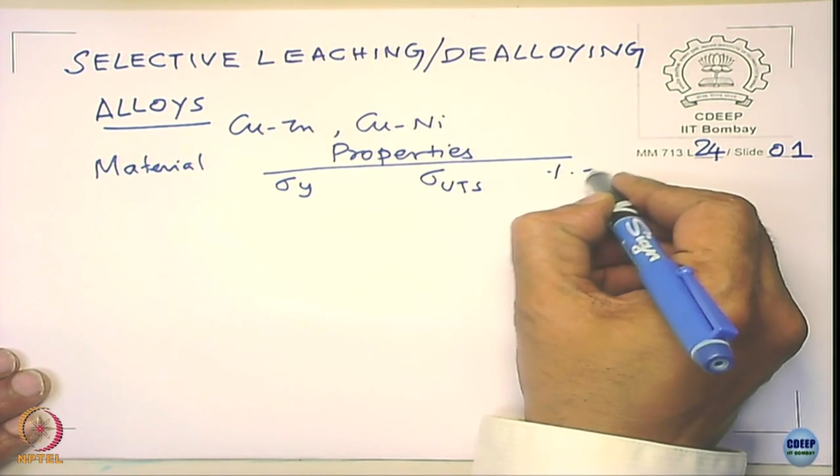Now, if you take a material and look at the properties, mechanical properties, maybe the yield strength, the ultimate tensile strength, and the elongation, this is the percentage elongation. The units can be megapascal, and you can appreciate how alloying helps to improve the mechanical properties.

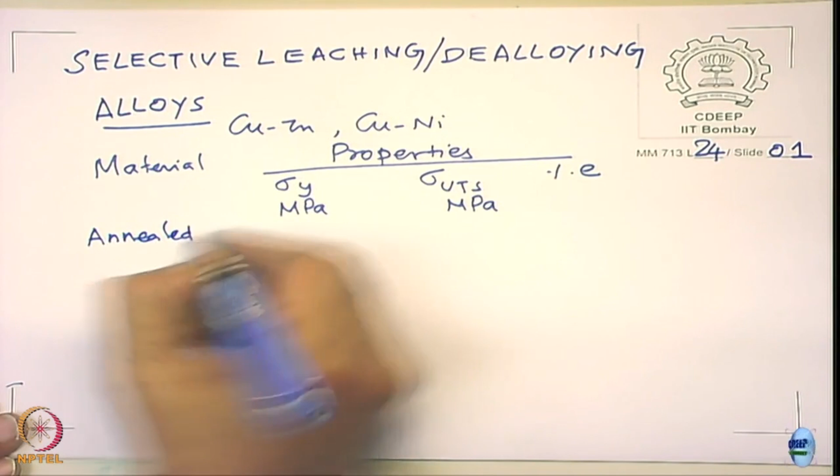Suppose you take an annealed copper, annealed pure copper. Copper is very pure. If you look at the mechanical properties, the yield strength is only 33 megapascal. The ultimate tensile strength is 209 megapascal. The percentage elongation is about 60.

If you take a commercial pure copper, take this, the strength increases considerably. Of course, the strength and the elongation are many times inversely related to each other.

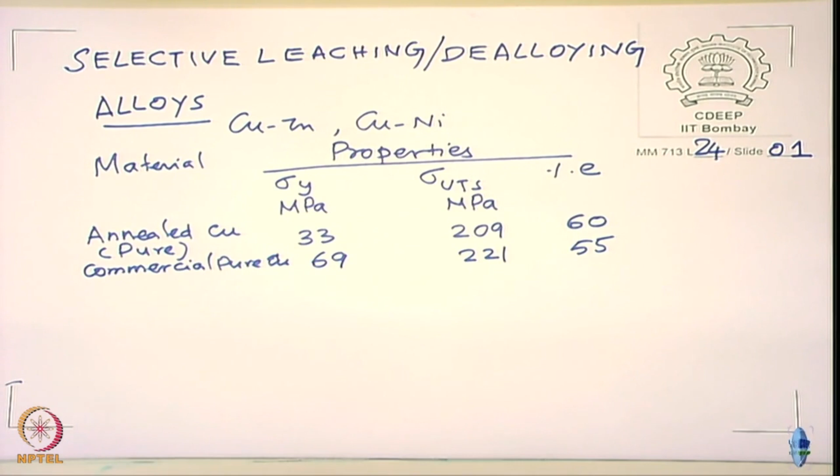But if you take a brass, which is copper with 35% zinc, annealed, you will see the strength increases quite significantly. In this case, even the elongation also is improving.

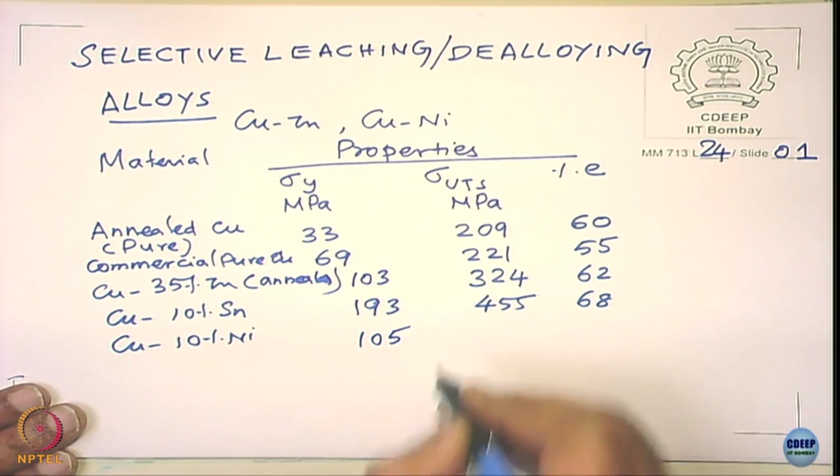If you take copper with 10% tin, you can see that the strength level is again increasing. If you look at the copper nickel alloy systems, say copper 10% nickel, I am talking about weight percent, the yield strength is 105 and the UTS is 275. The ductility varies depending upon cold worked or not, it can vary from 15 to 35, depending upon how they are done, quite widely.

If you increase the nickel content further, say 30% nickel, again there is an increase in the strength level, it can vary in a similar range. So, in essence, we go for alloys because we want to improve the mechanical properties, especially strength of the metal. But if you look at this, we have seen earlier when talking about galvanic corrosion,

when you have copper and zinc as two different entities, a copper block and a zinc block, if you couple them galvanically in the environment, what is expected to happen? The zinc will corrode preferentially, it becomes an anode, and the copper will act as a cathode. So the active metal dissolves and the noble metal gets protected. They are macroscopic, there is a clear entity of a copper block and a clear entity of a zinc block. Between these two the current flows, copper acts as cathode and zinc acts as anode, the current flows between them.

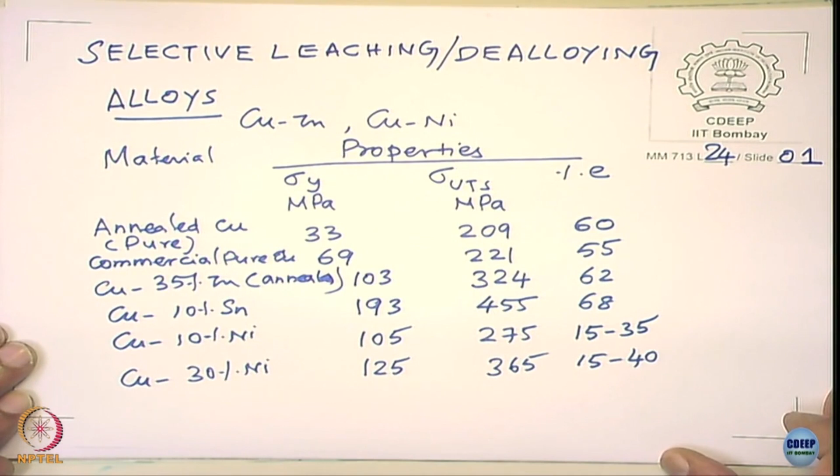But in an alloy, let us take copper with 35% zinc, which could be a homogeneous alloy, we will talk about it later. They mix it at atomic level, they are homogeneously dissolved, and more so in the copper nickel systems. The copper nickel system is known for having extended solid solubility. So at atomic level they mix very nicely, but even then the electrochemical property of copper is different from the electrochemical property of zinc, or in the case of brass, and in copper nickel alloy, the nickel is different from that of copper. So you could see having different electrochemical properties, and so you expect at atomic level exhibiting different corrosive behavior with respect to the two different alloying elements. That is why we talk about selective leaching, or dealloying.

Now, to just give an example of how the system can become complicated, let us take this phase diagram. This is a famous copper zinc phase diagram. I think most of you might have studied this in a physical metallurgy course, and you will see a lot of peritectic transformations, we call it. The copper zinc system exhibits different phases. When the zinc content is less, you have an alpha phase. As you increase the zinc content, what happens now? You can get a beta phase somewhere here. The composition lies between them, you get an alpha plus beta phase.

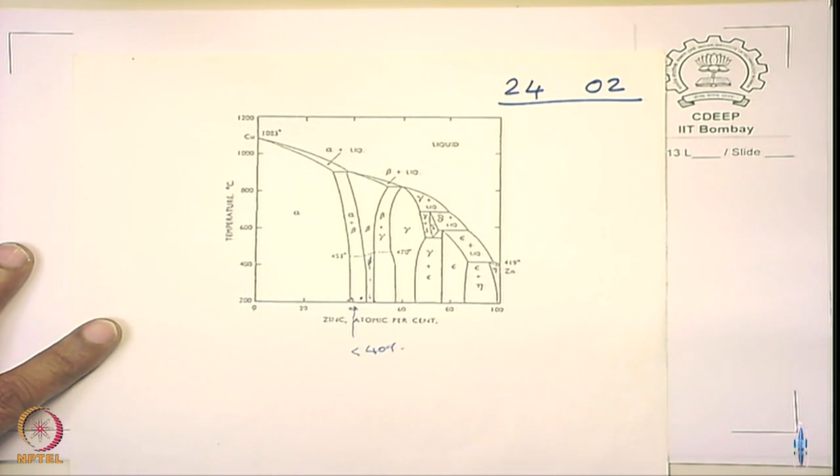Of course, you have gamma phase, epsilon phase, eta phase, and so on. From the point of view of real engineering applications, the alpha phase and alpha plus beta phases are important. We call them alpha brasses, alpha plus beta brasses, beta brasses, Muntz metal. These are all very familiar to you.

What I want you to understand is the amount of zinc varies depending upon the type of brass you take. Why do you take different brasses? Because they have different mechanical properties. The alpha plus beta brass will have different mechanical properties, in fact it could be much harder compared to alpha brass. So from the structural point of view, we need to use different types of alloys, which means they have different electrochemical corrosion properties. That is the crux of the matter.

Now these are some examples. You can also have various other alloy systems, and these processes are classified depending upon which element is selectively dissolving, selectively leaching.

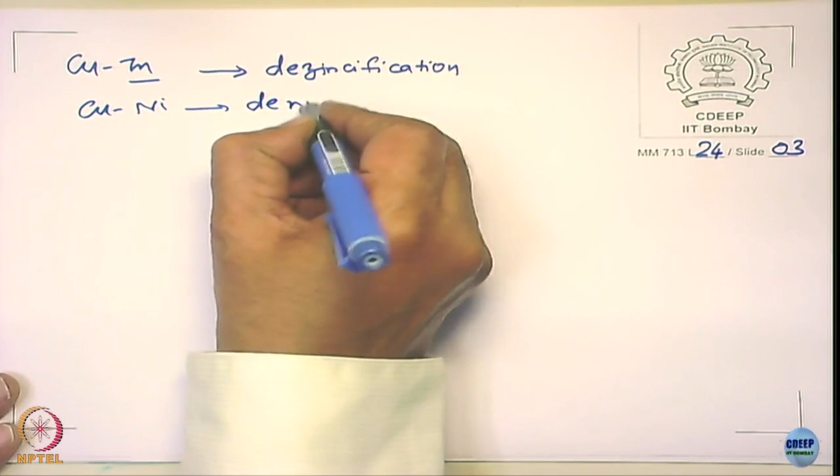In the case of copper nickel, we call it de-nickelification.

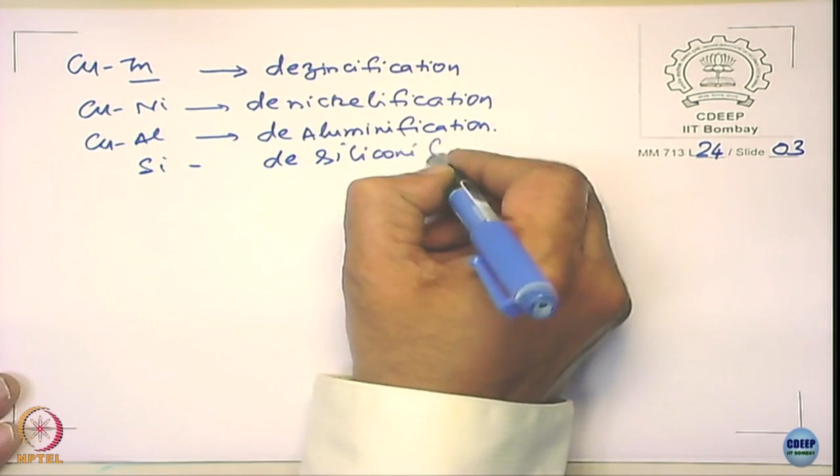You may have something similar to copper aluminum, and aluminum can be with even other alloying elements. We call them de-aluminification. Suppose you have silicon, we call it de-siliconification, and so on and so forth.

These elements are selectively dissolved because they are relatively anodic compared to the next element.

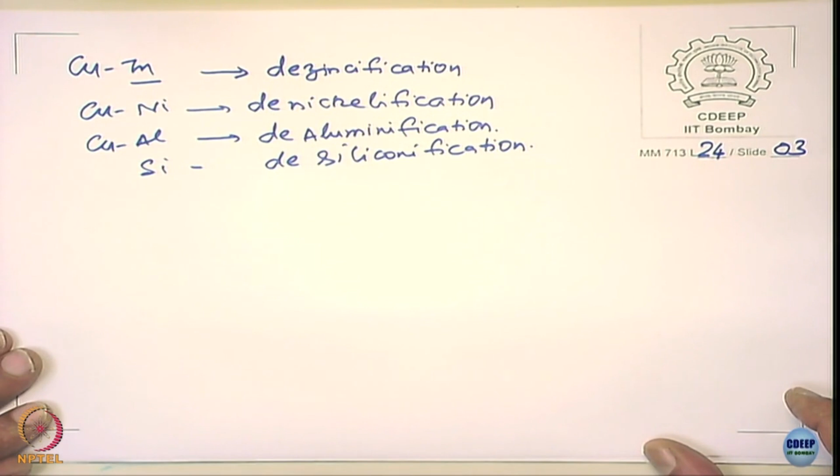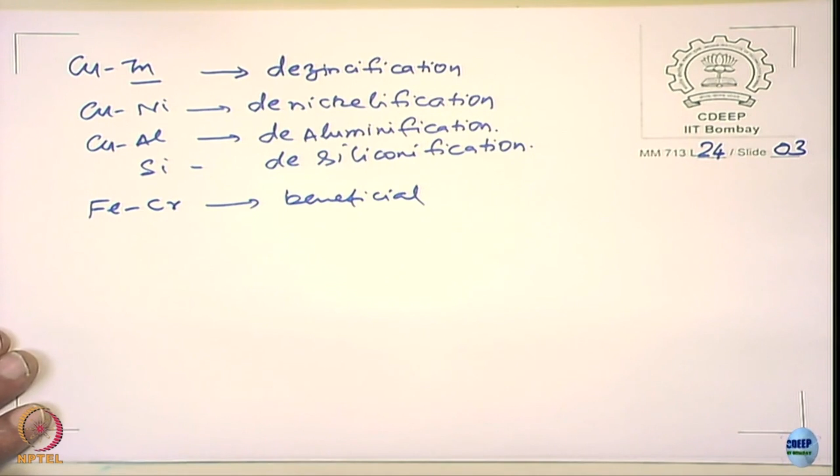Sometimes selective dissolution, preferential dissolution is beneficial. For example, in iron chromium, it is beneficial. Why? Because they form passive films. So you need to contrast these cases and understand how this is really happening.

Now, in order to use these alloys, let's say copper zinc, copper nickel, and whatever alloys we talk about, we need to understand the concept of selective leaching or dealloying in terms of mechanisms, in terms of the factors that affect dealloying. If you know both of them, then you can devise means to control dealloying.

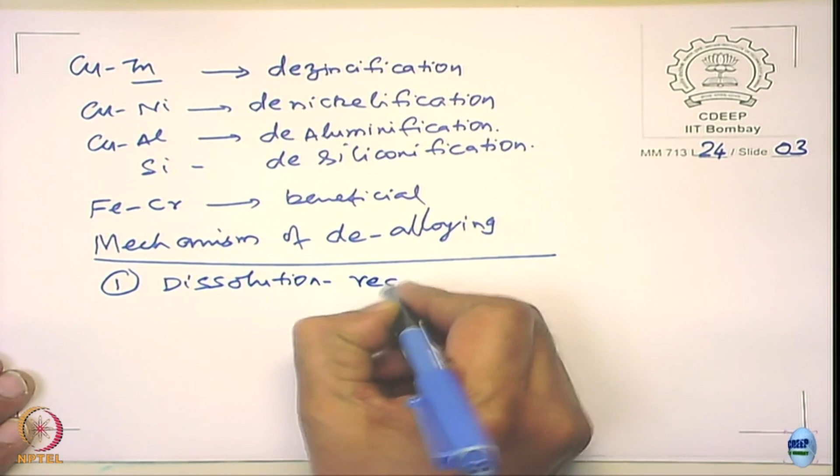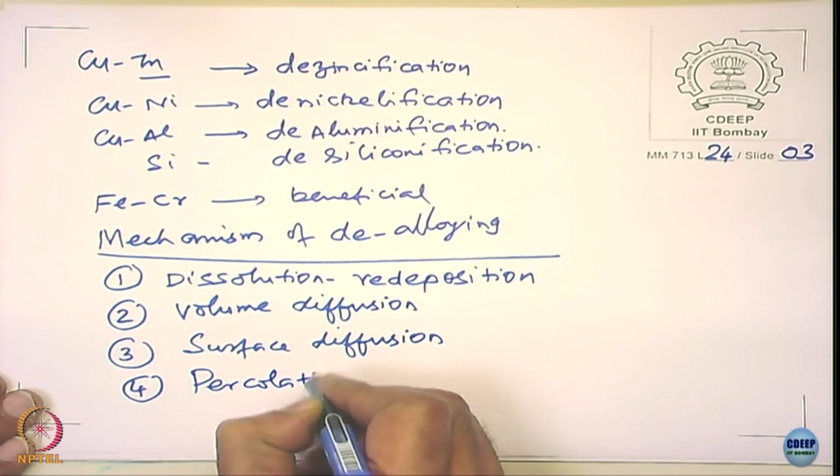So what we will do now is discuss how this mechanism of dealloying occurs. There are about 4 different important theories. One, dissolution-redeposition mechanism. The second is volume diffusion. The third, surface diffusion. The fourth, percolation model. I will be very brief in discussing these mechanisms, and they are fairly simple, not really that complex.

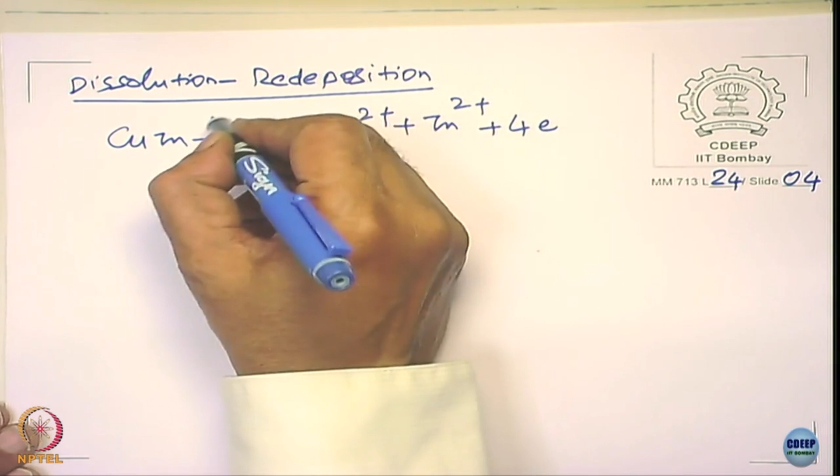Let us look at the first mechanism: dissolution and redeposition. Let us take the case of brass, a copper zinc system. When this alloy is exposed to the environment, we consider that both the alloying elements undergo dissolution or corrosion process like this. This is step number 1. Step number 2, what is expected to happen here, look at this.

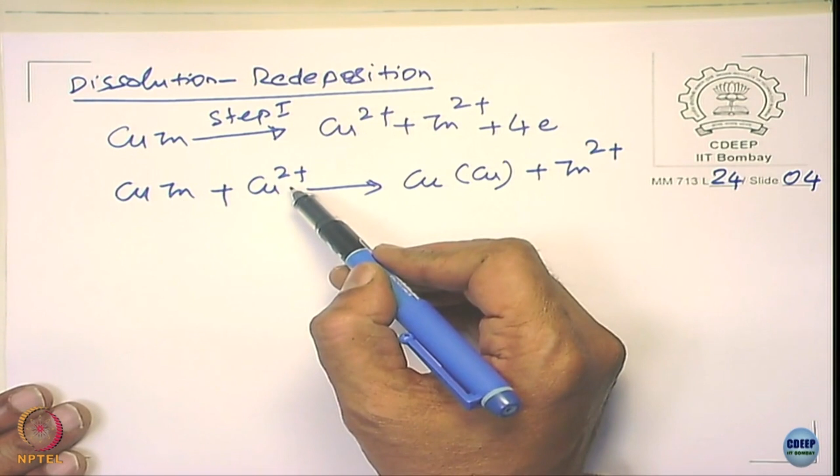In this solution you have copper ions and zinc ions. The copper 2 plus equilibrium is nobler compared to zinc 2 plus equilibrium. So the copper ions here would displace zinc ions in the lattice. So you have copper coming over as copper here. The copper ions in the solution undergo a cementation process, wherein zinc transfers electrons onto copper ions, the copper ions get deposited, and zinc dissolves as zinc 2 plus ions.

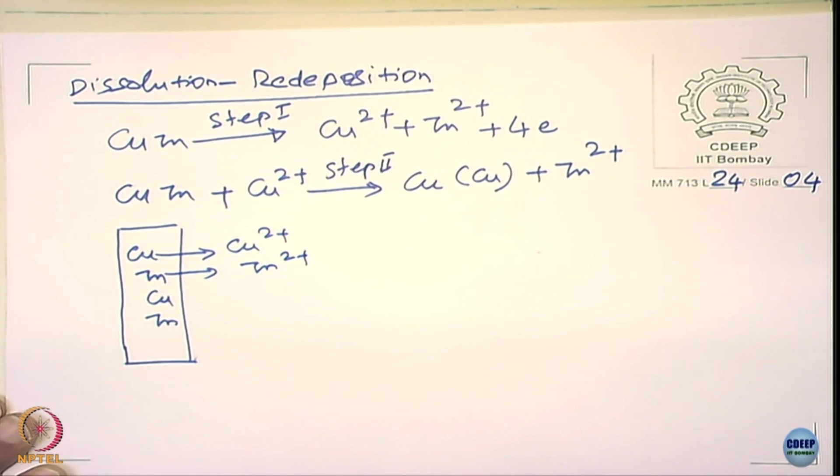So this is step 2 process. The copper zinc is in the lattice of the alloy, and copper 2 plus is also in the solution. It's occurring in the solution. I put it pictorially like this. Initially both dissolve, and of course it does not go from the bulk, it goes from the surface.

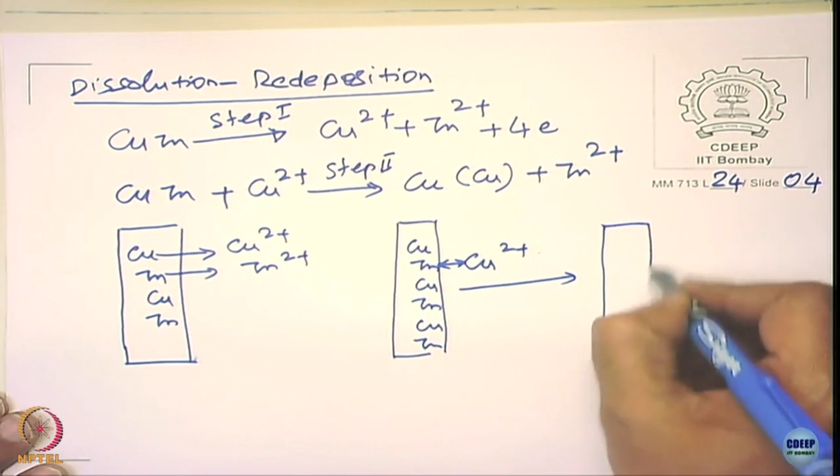Then what happens? You have copper ions, they get exchanged, that leads to copper here, you have again copper here, zinc, copper, zinc, and so on. So this is what is displaced. From the solution, which consists of copper ions, the copper ions being noble, replace zinc from the lattice of the alloy, and the copper gets redeposited. And you will form a porous structure. Look at this, it forms a porous structure, not a complete, normal metallic structure.

If this is the case, this is one mechanism that we talk about, right? This is one mechanism, and this theory has some limitations.

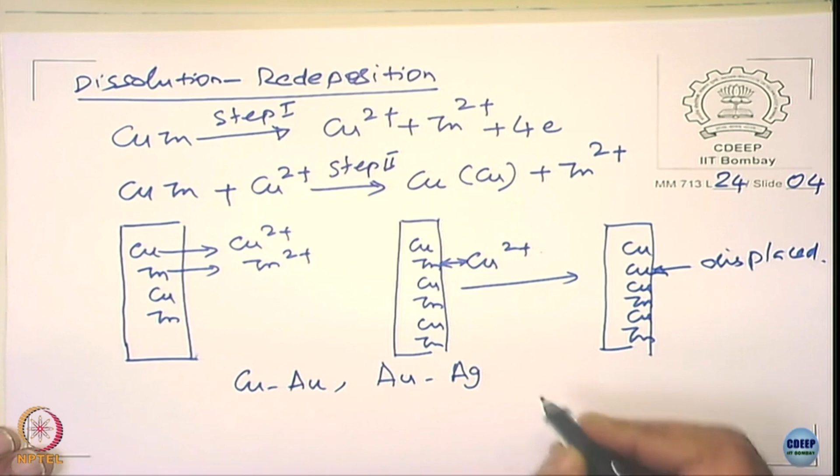For example, suppose you have copper gold, or gold silver, like this. The noble metal need not get... look at this case. The gold may not dissolve, only copper may dissolve, only silver may dissolve, because gold is quite noble in this case.

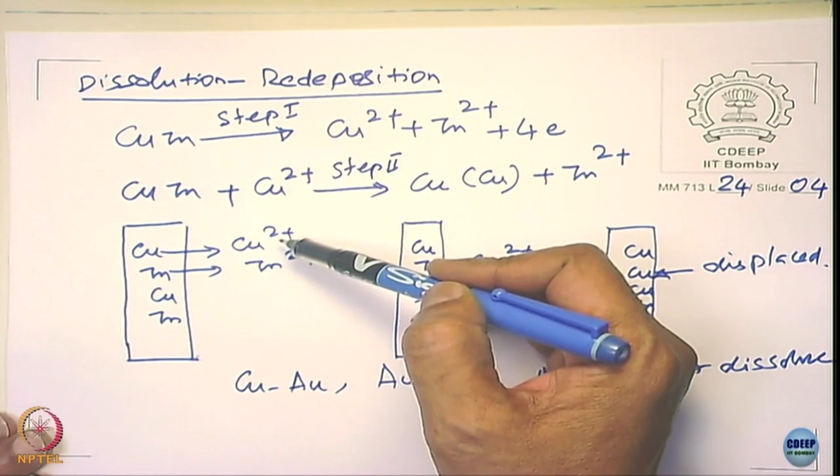Suppose I give you a copper gold alloy system and put it in an environment, not necessarily that copper... necessarily the gold dissolves, like you have copper dissolution in the brass system, because gold is noble in this case. So without dissolution of the noble metal, it is possible only the active metal can dissolve, right?

So in this case what happens now? It is saying it talks about the dissolution of only the active metal, the noble metal need not dissolve from the surface, okay. So it is really a selective dissolution and not a redeposition process. Do you understand the thing now? So this mechanism may not be valid in a system like that.

Simply copper can dissolve and this can dissolve. It is done also - you know how the goldsmith separates the gold? The gold has got copper and gold in ornaments, for example. How does he separate? He takes this and melts with silver, forms an alloy, and then pours it into the nitric acid solution. What happens now?

Only silver comes out, okay. Copper of course comes out. Gold does not dissolve at all. So you can have a selective dissolution process wherein noble metal need not dissolve actually, okay. So this mechanism does not explain those alloys where the noble metal will not dissolve at all. So there is no question of redeposition process.

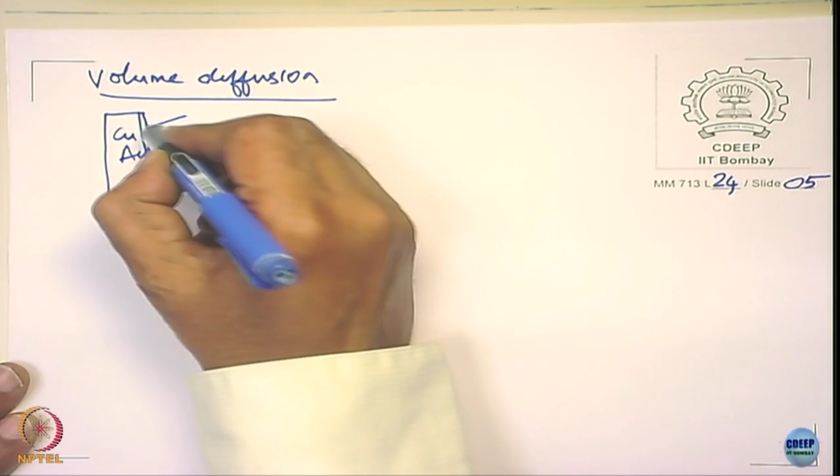Now if that is the case, suppose I have a bulk alloy, let us say it consists of copper and gold, something like that. In the surface, you have a surface here. In the surface it is possible that only copper comes out and gold gets enriched, right. So it is a selective dissolution.

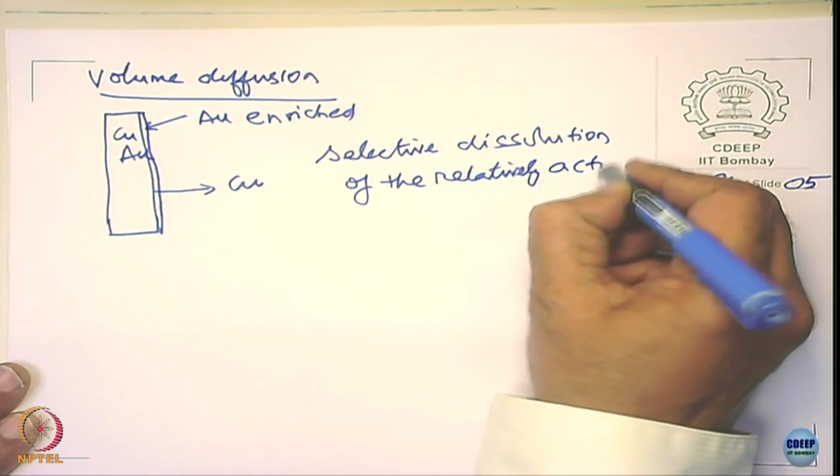Of the relatively active metal, active element, and noble metal does not dissolve. So only copper comes out, gold remains on the surface.

And there is a problem here. Can you tell me what is the problem? The problem is that the diffusion of the elements at ambient temperature is so low, right. If this process has to continue, unless the copper comes to the surface, it is not possible for the dealloying to continue, am I right?

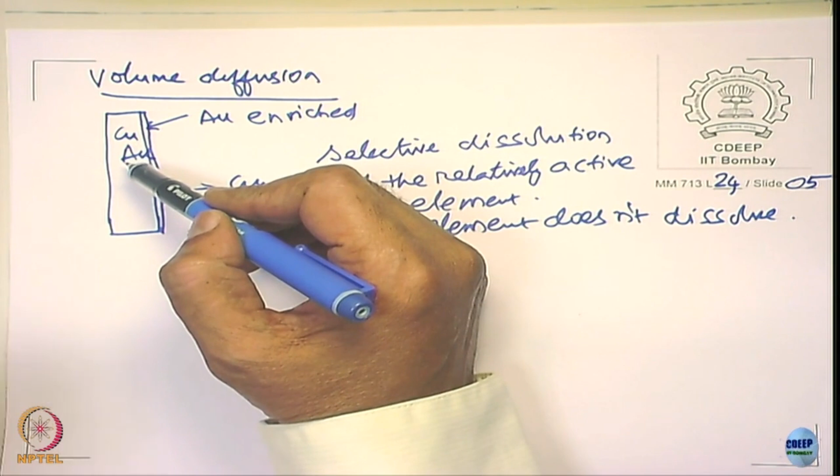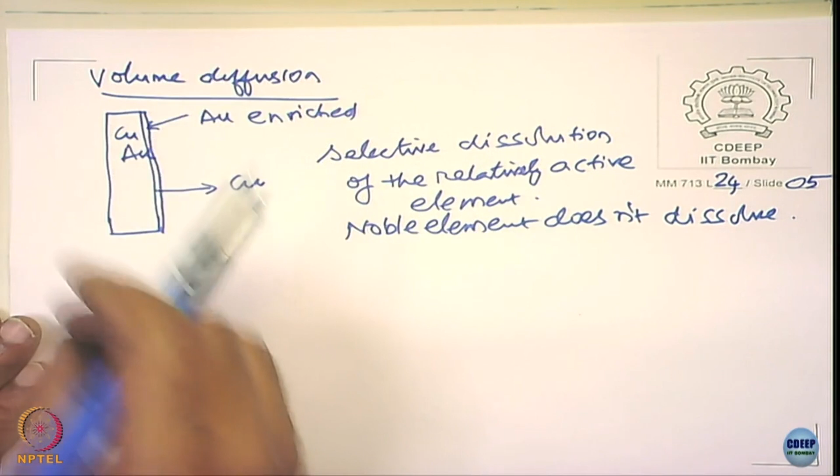For the dealloying to continue, the copper from the lattice has to diffuse and then come to the surface, and then only there can be dealloying. If it does not happen, a few atomic layers of the alloy will dissolve where the relatively active metal goes into solution, and thereafter there will be no dealloying taking place, because the diffusivity is low at ambient temperatures.

You might have heard of high temperature oxidation, right? There you talk about diffusion of aluminum, diffusion of chromium to surface, diffusion of silicon to surface, get oxidized, forms a nice protective film and all that is possible. But at ambient temperature, the diffusion of these elements is so low, you do not expect them to continue with the dissolution process.

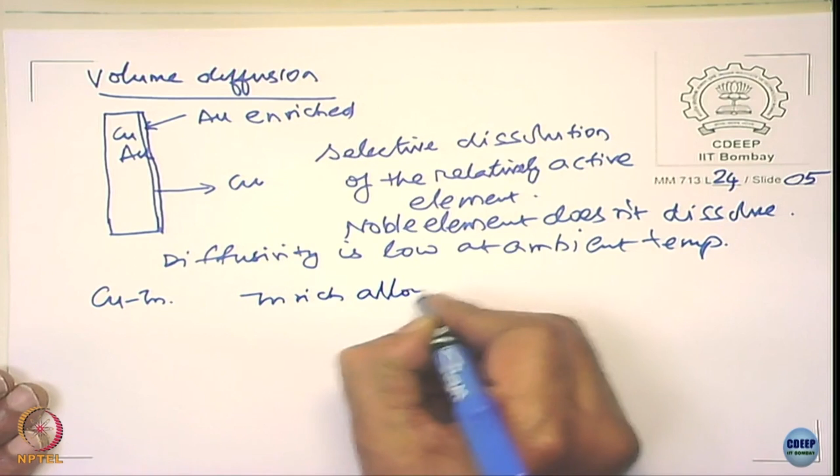But however, what people have done - they have noticed that when there is dealloying taking place, people have observed change in the phases. For example, if I take copper zinc system, I take a zinc rich alloy, okay, and when it dissolves...

So the brass will have copper rich on the surface because zinc is removed. So as you move from the surface to the bulk, the phases will be alpha, alpha plus beta, beta, beta plus gamma, and gamma, and so on and so forth, isn't it? That is how it happens.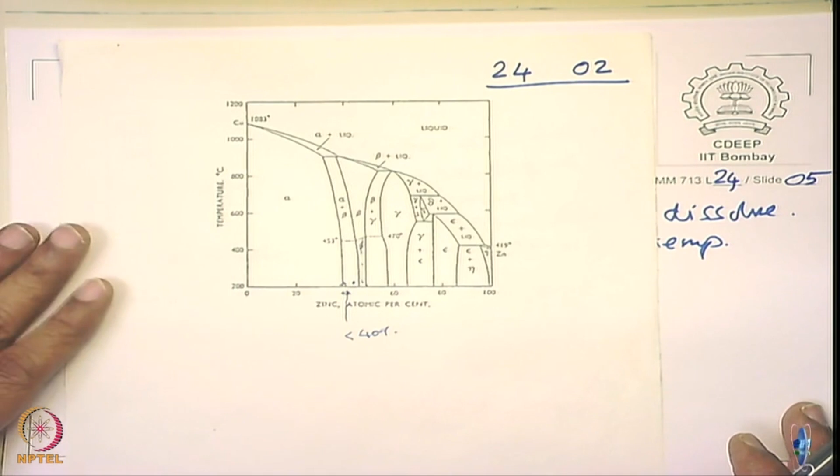So that is how people have detected in some cases to show that there is a selective dissolution of these elements. But however, the thickness of these layers is so small. So this theory has a little bit of a problem, but of course they have proposed what is called the divacancy theory.

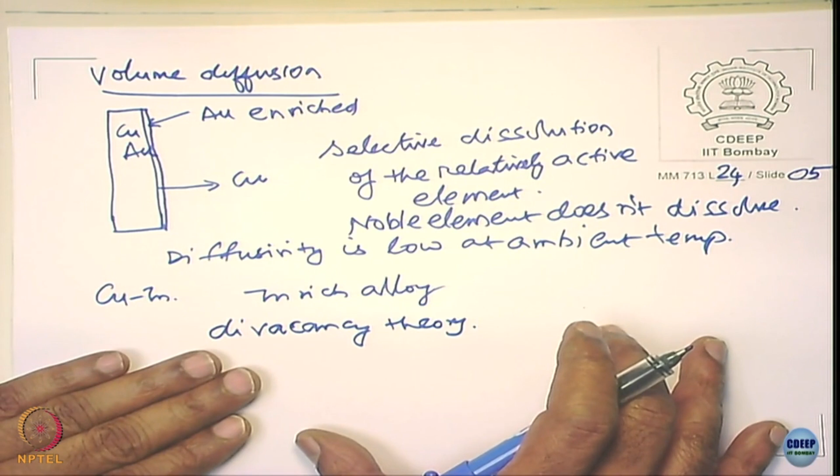They say that if you have two vacancies together, it is easy to migrate. So that is a theory that has been proposed, but it has not been well proven across various alloy systems. The volume diffusion is considered to be more difficult, and it is not very favorable for dealloying of various metals.

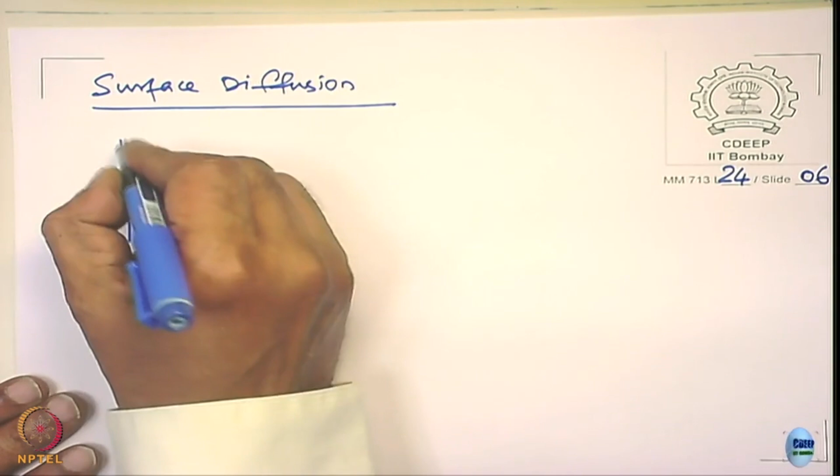There is something called surface diffusion mechanism. This is very interesting. Now I have a surface, okay, and I get dealloyed. It is a dealloyed surface, okay.

When it dealloyed, then what will happen to the surface? Surface will be rough and porous, there will be atoms loosely held, right. Now these atoms migrate through diffusion process.

Because when the atoms are alone, the energy of the atom is high, because surface becomes quite large, right. So when the energy of the surface is more, then what happens? They try to agglomerate, actually. So what happens? They migrate, diffusion process, and then form islands of noble metal clusters, noble metal.

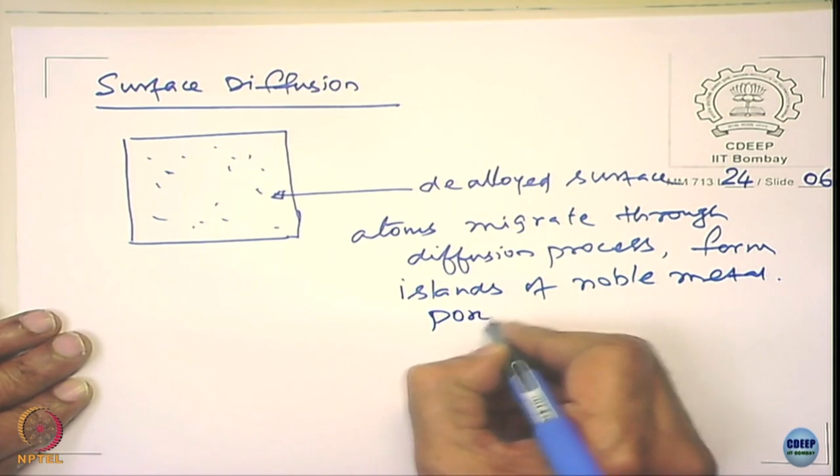You will see porous structures, porous, you see pits. So the initial process is the active element dissolves, the noble element remains on the surface, but subsequently what happens? The noble elements, the atoms, they diffuse on the surface and they form clusters. In the process what happens?

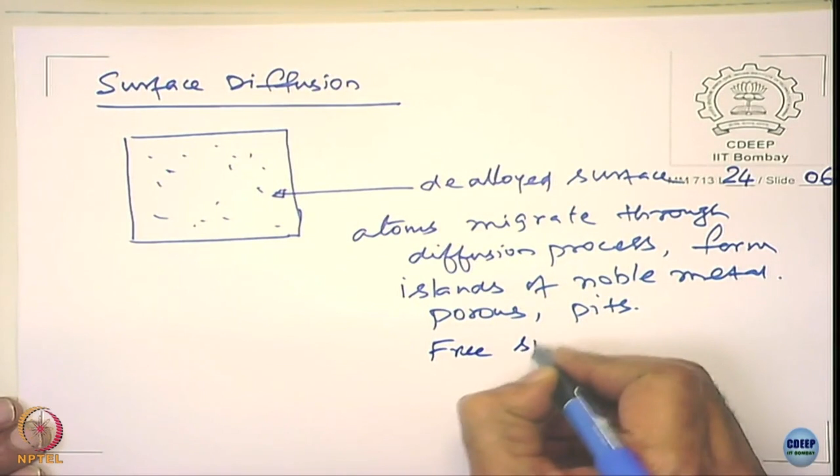You are going to generate a free surface again, am I right? You can create a free surface because the atoms are moved and formed as clusters, so it creates a free surface that again leads to dealloying.

So people have been modeling this and then trying to show that the dissolution is by clustering process. People have shown nanostructures, people have shown the porous structures, okay, and that's how the dealloying continues. It's not just the surface process; it can go subsurface process.

So surface diffusion process is a result of dealloying of the active element, the clustering of the atoms because of the surface energy, leading to creation of the fresh surfaces, and subsequently again there is a dealloying, and the process continues, and dealloying happens eventually to a larger thickness in the alloy, right.

There is a small variation in this concept. This is called percolation. You know what is called percolation, right? This model probably many of you might have studied, in various contexts of that.

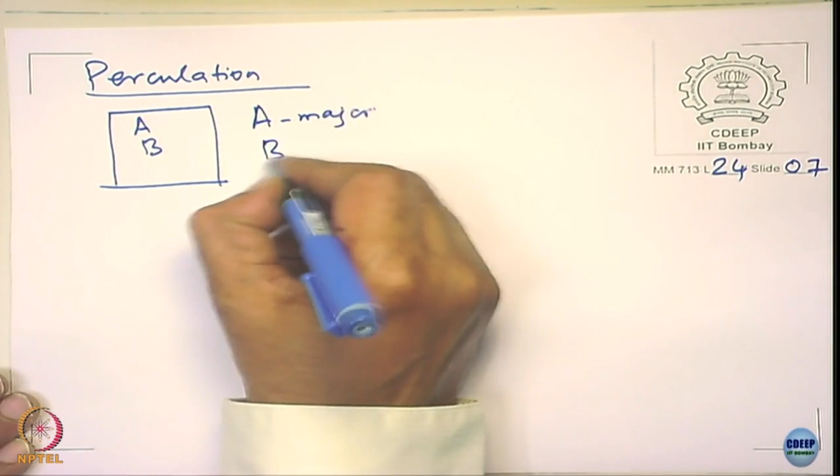You take a solid containing A and B, any entities that you have, you mix them thoroughly, right? Suppose A is the major element and B is a minor element, right? You mix them thoroughly, the B's can come in contact with each other when you exceed the concentration of B beyond a level, right?

Do you get it? So when I have A and B, I mix it. If the content of B is very low, then all B are isolated, okay, or all the B are surrounded by A nicely. But if you keep on increasing B, at one level, B and B will come in contact with each other, okay. So that means that makes a continuous path for the B to dissolve, am I right? When the B and B are coming in contact with each other, then it starts dissolving actually.

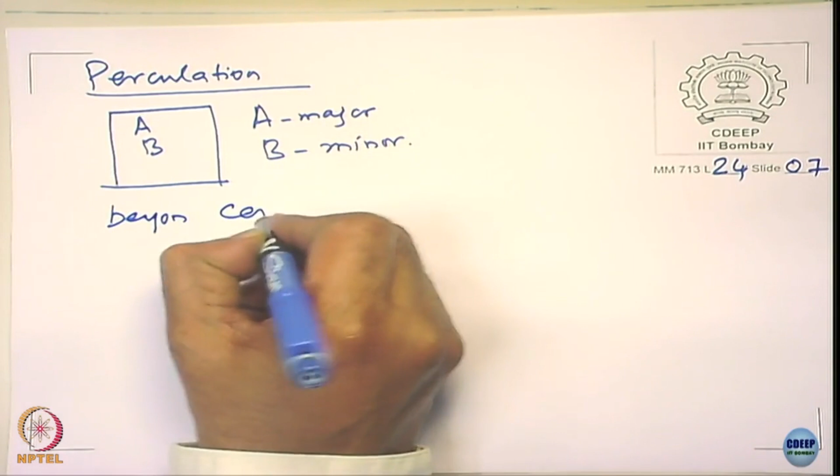So the percolation model tells that beyond certain concentration, the dealloying occurs. This is a very interesting theory.

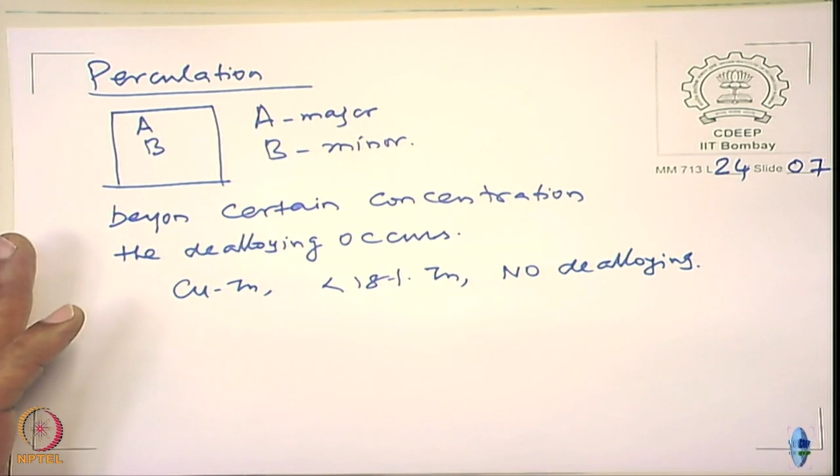For example, take copper and zinc, less than 18% of zinc, no dealloying. If you increase the zinc content beyond that, the dealloying occurs. So the percolation theory talks about the active elements coming in contact with each other so that the dissolution path is quite continuous, right? It goes like that.

But please notice that the percolation model and the diffusion model can work together, right? I can have some threshold level of active element that leads to dissolution, but even then there can be diffusion of the noble element on the surface so that they can form clusters. So the percolation model does not totally exclude the surface diffusion model actually, right. So it is quite possible.

So the percolation model explains why you need critical concentration of alloying element in order to get the dealloying. Without that it will not happen, right. So that is an important thing when we talk about the dealloying of materials actually, okay. We will talk about factors affecting dealloying shortly, okay, but these concepts are important in order to understand the factors that control the dealloying of the metals and alloys, okay.

Is it clear now actually? So far we saw 4 theories, one involving that both the noble element and the active element dissolve in the first instance, and subsequently the noble element deposits back onto the surface and it displaces, and then the active element goes to solution, right. This is called displacement process.

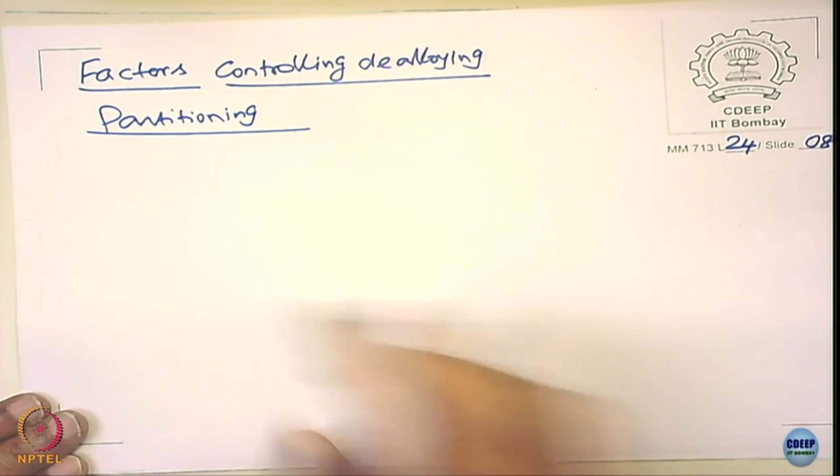What are the factors controlling... now this is called as partitioning, right. The partitioning will depend upon E N, which is noble - I call it the potential of the noble element - and the potential of the relatively less noble element we call the active element. I do not call it anode and cathode, active element, right.

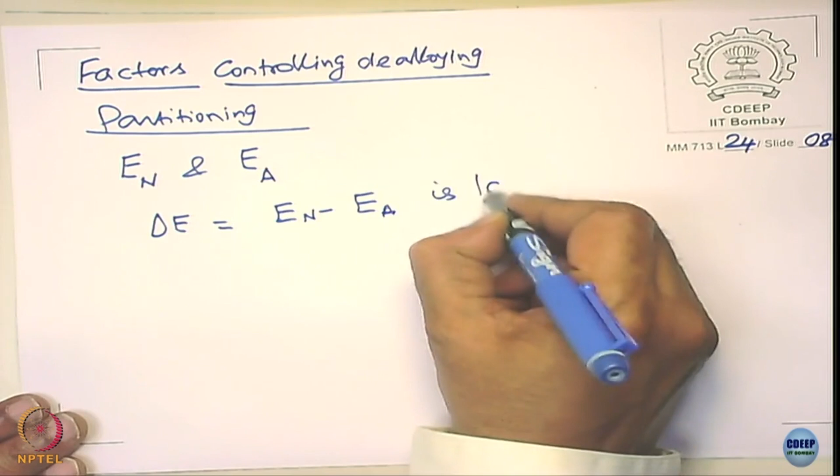If the delta E, which is equal to En minus Ea, is large, then dealloying increases.

What does it mean? You take copper zinc, and you take copper nickel. If I make a tube for a heat exchanger that carries seawater, in one case it is copper zinc, in the other case copper nickel, both cases seawater is being used - which of the two tubes will fail earlier? Copper zinc will fail earlier, that is what I meant here, because the potential difference between these two is quite large as compared to this.

And secondly is the composition.

Higher the content of the active element, more is the dealloying.

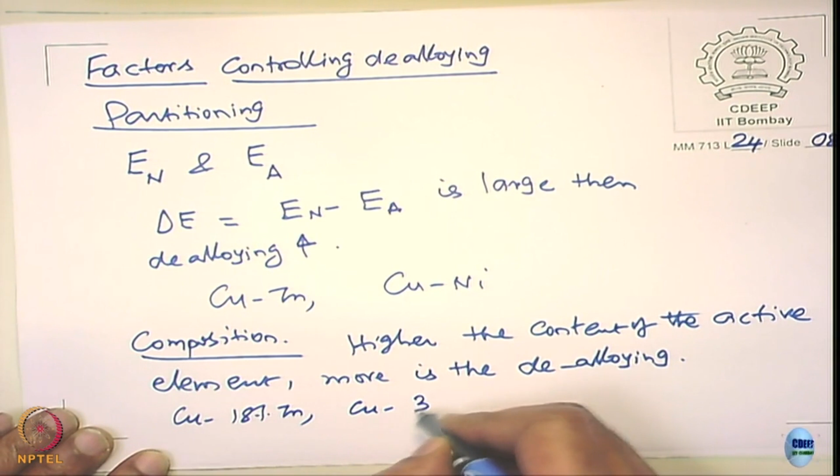Right. Say an example, copper 18% zinc, copper 35% zinc, and copper 40% zinc. These both are called alpha brasses, and this is called the alpha beta brass, this is called the Muntz metal. The famous Muntz metal is copper 40% zinc. So the dealloying will increase from this to this and to this, am I right? Because the delta E is going to be the same in all cases, but the content of the active element increases from this to this to this.

Similarly, you can also have copper 10% nickel, and copper 30% nickel.

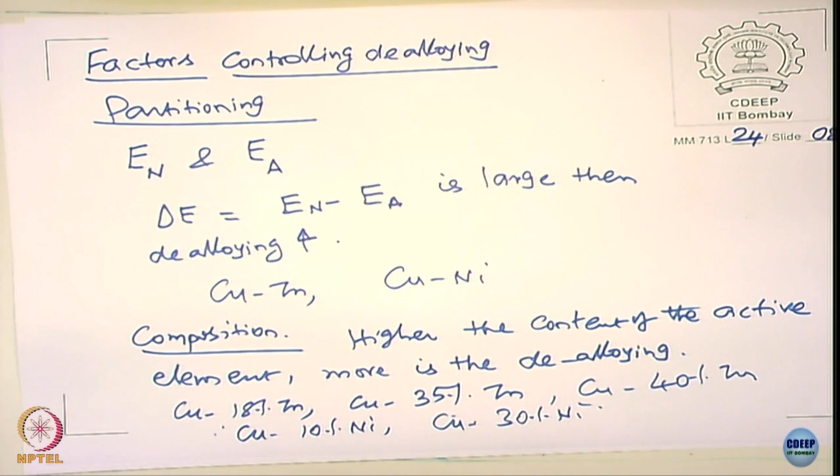The question then you will ask is, why would people use alpha beta brasses? In seawater people use alpha beta brasses. Why? Because the alpha beta brasses have better erosion corrosion resistance. They have better mechanical properties. So the damage mechanism need not always be dealloying. It can be a simultaneous process. When there is a flow line, there is velocity, you can have dealloying, you can also have erosion corrosion.

If the erosion corrosion is more dominating, then what happens? Then you will see that copper 18% zinc will be failing faster than copper 35% zinc, because copper 35% zinc has got better mechanical properties. So you need to look at the overall perspective in terms of metal selection, alloy selection for given applications. But what we are seeing here is understanding the science of dealloying, so that is what you should try to understand.

Now, in addition to this, it also depends upon the environment. More oxidizing environment, more corrosive, more dealloying. An example is chlorination. People do chlorination in cooling water systems, and if you chlorinate, chlorine is an oxidizer, and so more dealloying occurs.

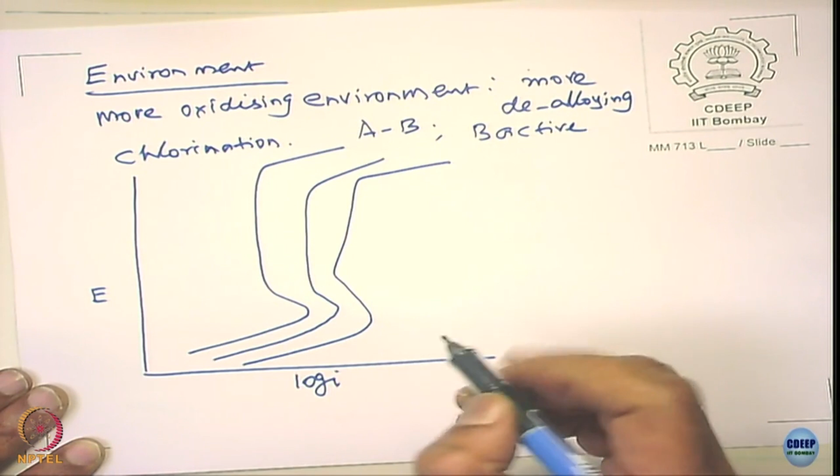Let me look at something slightly more related to alloy chemistry towards dealloying. Let us take that I have element A and B. B is active. So the B concentration increases as you go from curve 1, 2 and 3, the concentration of the active element increases.

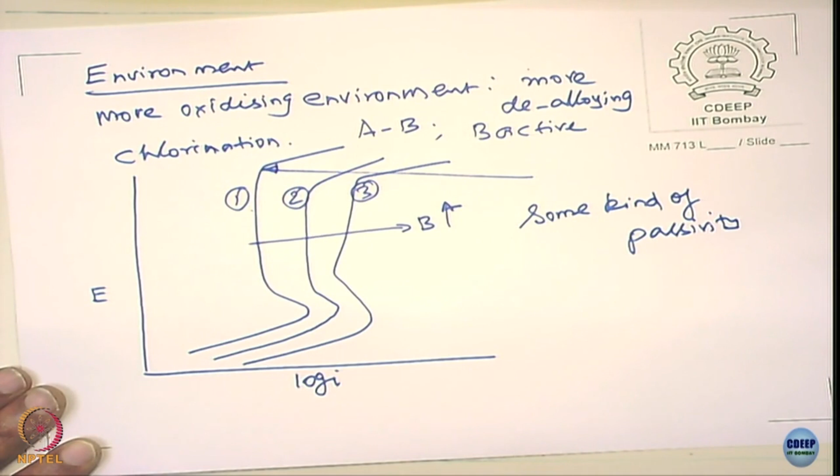Now, they show some kind of passivity. And you have a potential here, and we call the potentials, and this is called EC. Beyond this, selective leaching occurs. So there is a driving force for corrosion to occur.

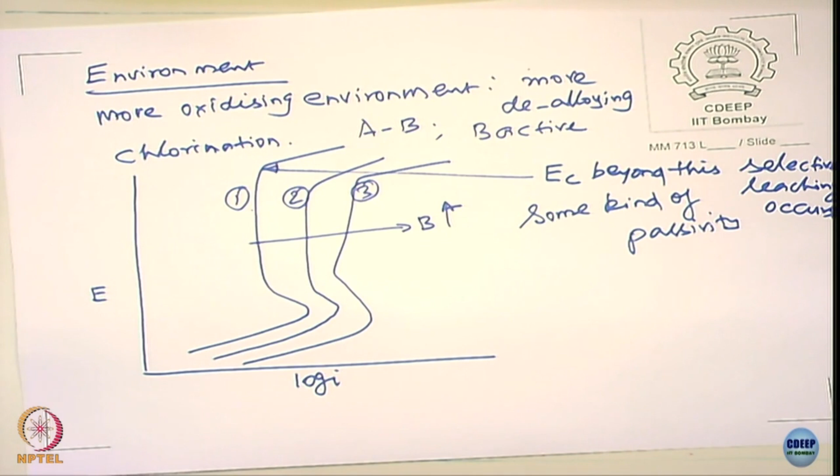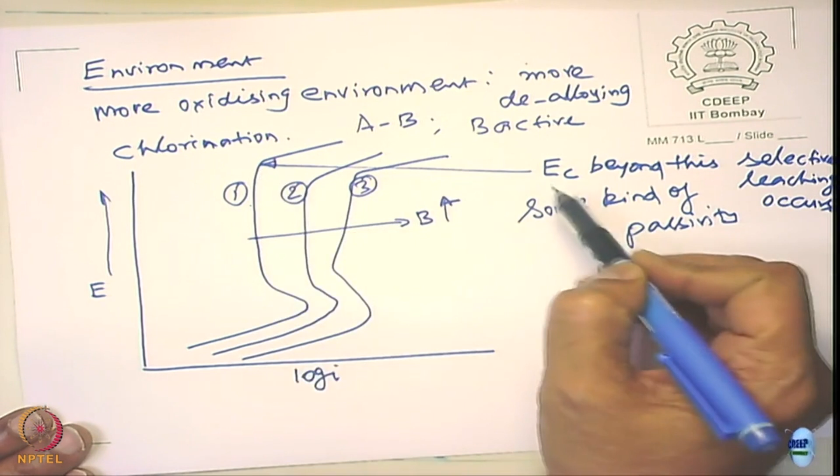So for these alloys, in order to find out whether they undergo dealloying, how effective they are, you can carry out a polarization curve and find out what is the EC value. EC here represents the potential above which dealloying really occurs. And the increase in passive current density means that there is more dealloying taking place. Now, if the corrosion potential exists above EC, if Ecorr is going to be greater than or equal to EC, then what happens?

Dealloying occurs, right? Because only above EC do you have dealloying, you get these polarization curves. So how do you get Ecorr at that particular value? What is the basis? When will Ecorr go here? In actual situations, when do you expect that will happen? What is the criteria for that?

Yeah, that's right, you call it transpassive, but I don't want to call this transpassive here. We call this the potential above which there is dealloying taking place. When will Ecorr go above this? It depends upon the reducing reaction, right? You have one more reaction. This is your anodic reaction, and you have a cathodic reaction.

If the cathodic reaction, if the kinetics support that, suppose this is for the cathodic reaction, it cannot happen. But if the cathodic reaction occurs somewhere here, what happens? Ecorr is going to lie above the EC, so you are going to have dealloying here, no dealloying here. So what I mean is the environment also is important.

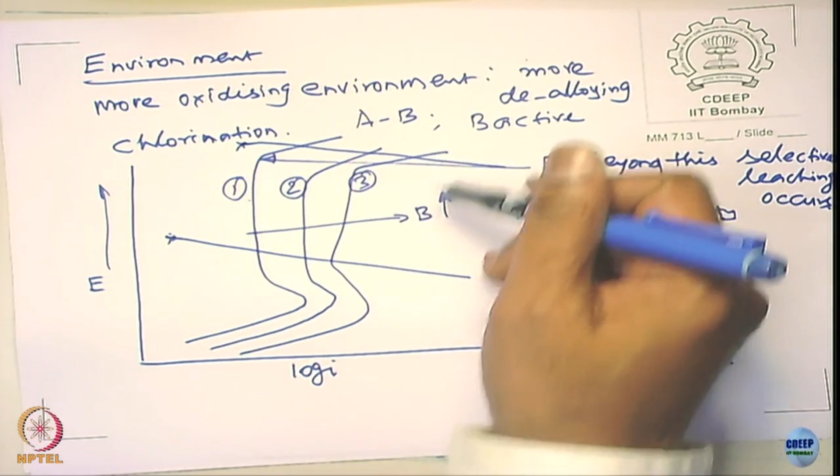If the environment is less oxidizing, then the dealloying will not take place at all. This concept we have seen shown many number of times, how Ecorr really occurs. Ecorr is a mixed potential, meaning it depends on both the anodic as well as the cathodic kinetics. So it depends on the alloy, it depends upon the environment as well. That is the point you need to understand.

Now the EC, of course, depends upon what? It depends upon the alloy, right? The EC will keep reducing if you are going to alloy more and more active element in the system.

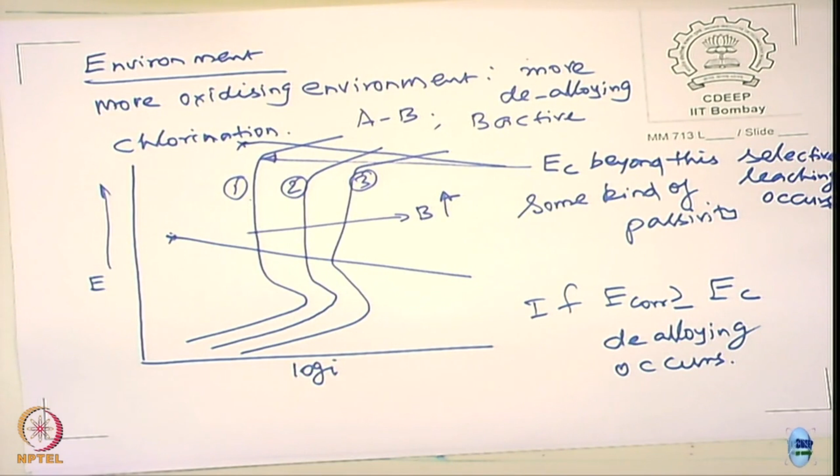It is not pitting here, you don't see a pit in this case. That's why in copper-zinc and copper-nickel systems you don't get a pit at all. If you observe the surface, you'll see it's enriched more with copper, because zinc is getting out of it. Similarly, in copper-nickel, nickel comes out of solution.

In fact, if you take a copper-nickel system and carry out a polarization, the solution color will turn green. Why? Because more nickel is getting dissolved. So you see a nice green coloration at these particular potentials. You may see nickel also here, but the amount of coloration is very small. So you can show that nickel is preferentially dissolving over these potentials. Hope this point is clear.

Now we have seen these things - what does it really mean in practical applications? Where do these problems occur? I am not sure to what extent you can see this picture here, let me try to show it.

You see this black coloration here, greenish black color actually. I don't know how far it is able to be seen. This is a copper-nickel alloy in seawater application in one of the refineries located in Mumbai, about a couple of years old. The seawater was passed through this heat exchanger. Now you see the coloration here - I hope you are able to see it. Look at this color, you can see it is bright here, right?

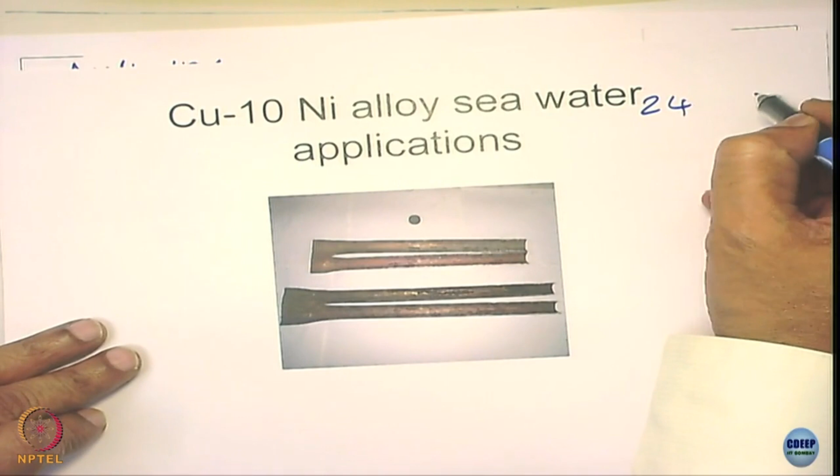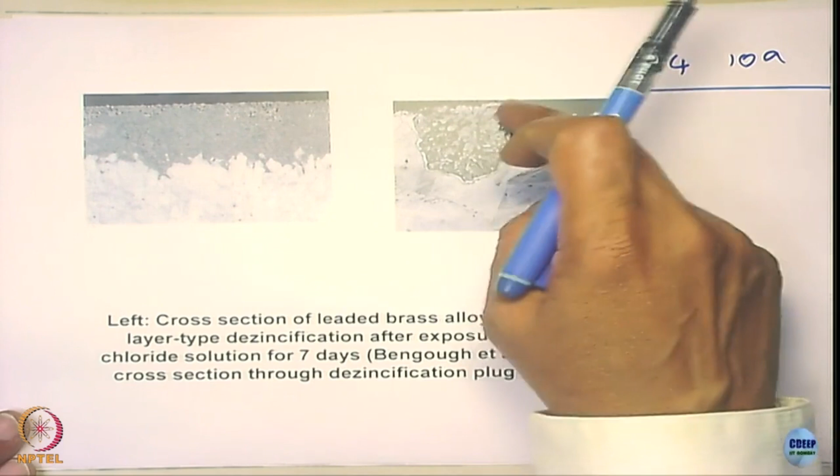So if we have this, notice now - if I remove zinc from brass, what will happen? What will happen to strength? It will reduce, because that is what is giving strength. So the strength will reduce actually. And in this case it not only reduces strength, it also brings stress concentration at these kinds of pits.

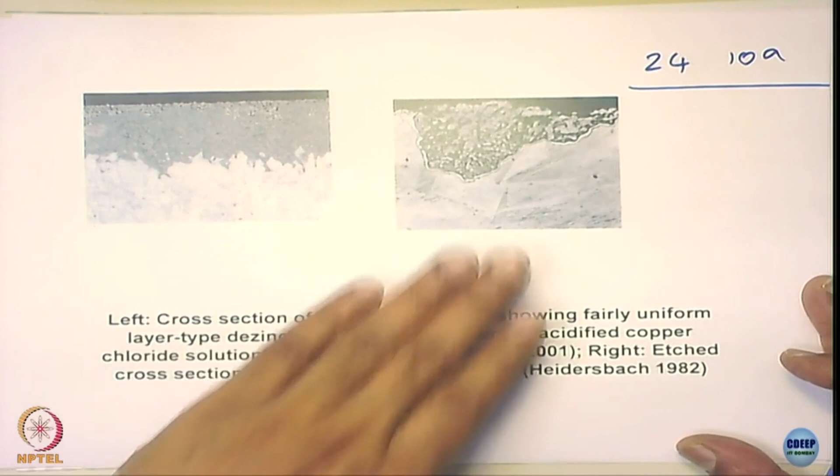So these are the real problems that happen, but fortunately dealloying is not as fast as pitting corrosion, but yes, it does affect over years. And in this case, of course, this is an accelerated test with acidified copper solution, so only 7 days, but in practice it may take a couple of years to get the dealloyed layers on the surface.

Is sensitization same as leaching? No, sensitization is not leaching, right. In sensitization - you are talking about stainless steels here - you are taking the chromium out of the grain boundary area. So you are going to have simply iron, iron simply dissolves there.

And if you have a stainless steel, this goes the other way around - iron and chromium dissolve preferentially and it forms a nice passive layer, it stops actually. In fact, a sort of selective corrosion is happening in stainless steels. But the only thing that happens is the chromium forms a film, so it does not allow subsequent dissolution of the alloy. So dealloying in some cases can be beneficial, it can help, but in cases where it is not passivating, it is not good, because it reduces the strength of the alloy significantly and causes problems.

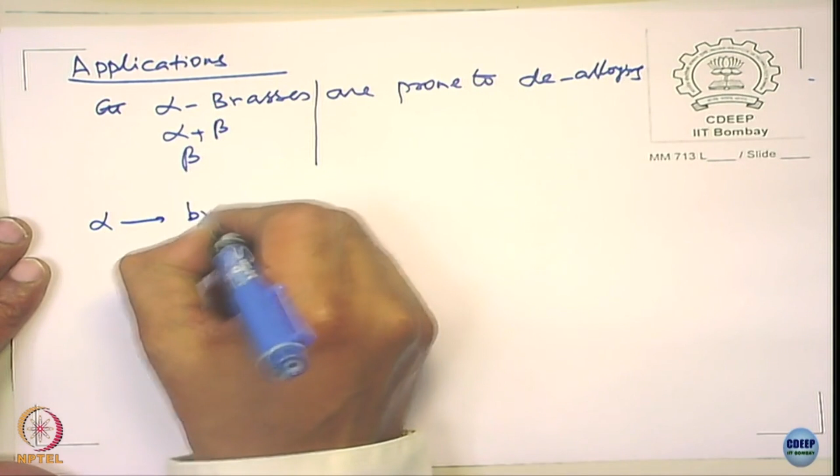What people have done in order to avoid this dezincification process in alpha brasses, you might be knowing what is called Admiralty brass. I think people from the Navy know that it was an Admiral who first formulated this particular alloy, and that is why it is called Admiralty brass.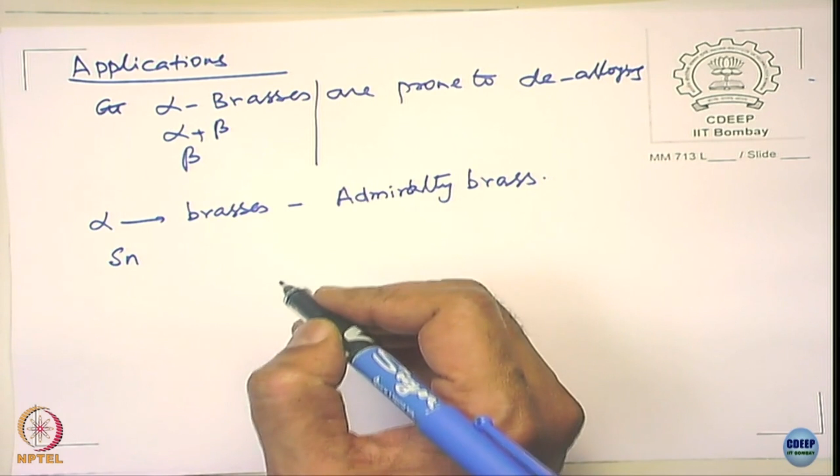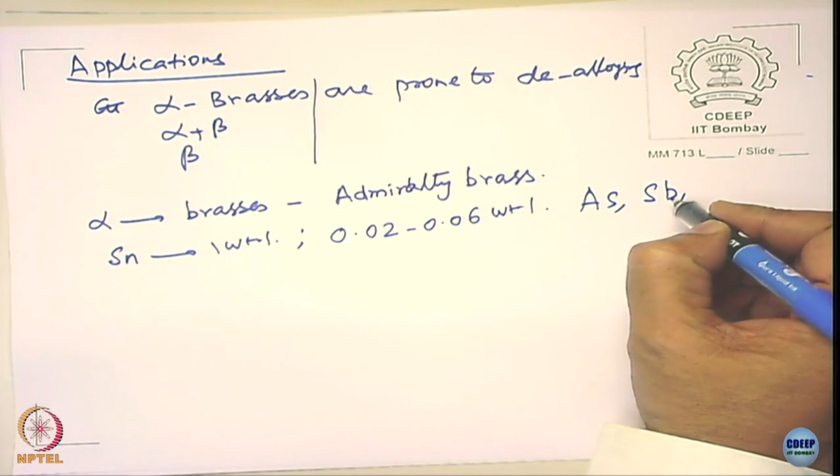Admiralty brass consists of tin, about 1 weight% of tin added to the alpha brasses. To support this, they also add small quantities, weight% of arsenic, antimony and phosphorus, and these are effective in curbing the dealloying of alpha brasses.

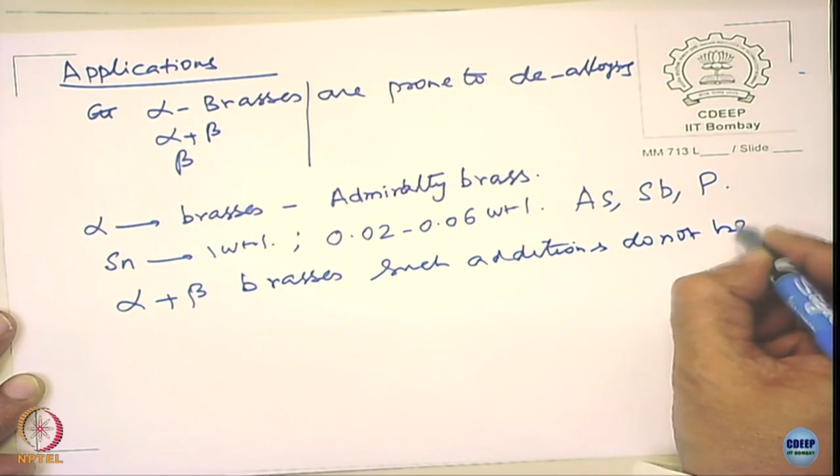The mechanism is not completely known; there are some speculations, but it's not fully understood. But in alpha-beta brasses, such additions do not help, so they continue to undergo dealloying, same as beta brass.

For most seawater applications where you want a really safe solution, people go for copper-nickel alloy systems. People use copper-nickel predominantly for seawater applications.

I will just cover another topic which is relatively small and related to dealloying, and this is called graphitic corrosion.

In the solid state, diffusion of these elements at ambient temperature is very, very slow. I don't think the diffusivity of zinc is significantly higher either; the diffusivity of zinc in copper is still very low. If diffusion controls the dealloying, then the rate of dealloying would be very low. So how do you explain the observed rate of dealloying, which is much higher?

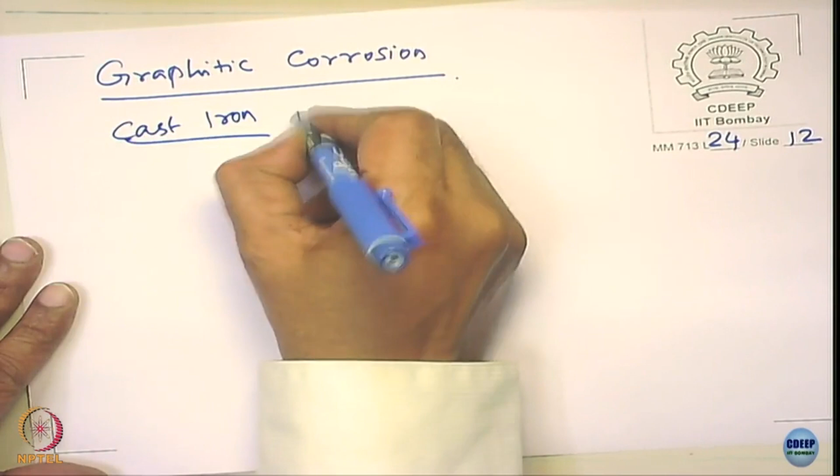I just want to finish up this here. People have been using cast iron pipelines. Those who are not familiar with cast iron, let's spend a minute to get an idea about what it is. What is the difference between a steel and a cast iron?

Can you give a better definition of that? It's an alloy of iron and carbon that can be casted. I can cast anything I want - the presence of eutectic phase in this.

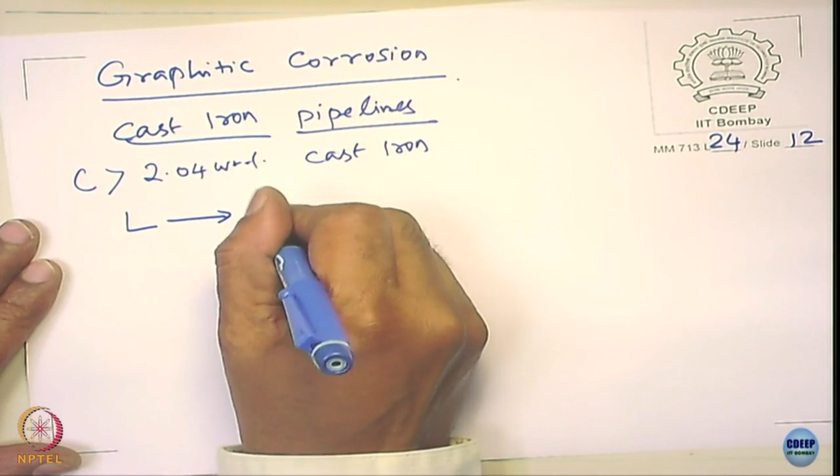You are right. So in the solidification process, it does not go through a gamma transition from the liquid, isn't it? If you look at the iron carbon diagram, in all cases the liquid directly can give rise to alpha plus Fe3C, or it can give alpha and then alpha plus Fe3C. So it does not go through a gamma phase, first of all.

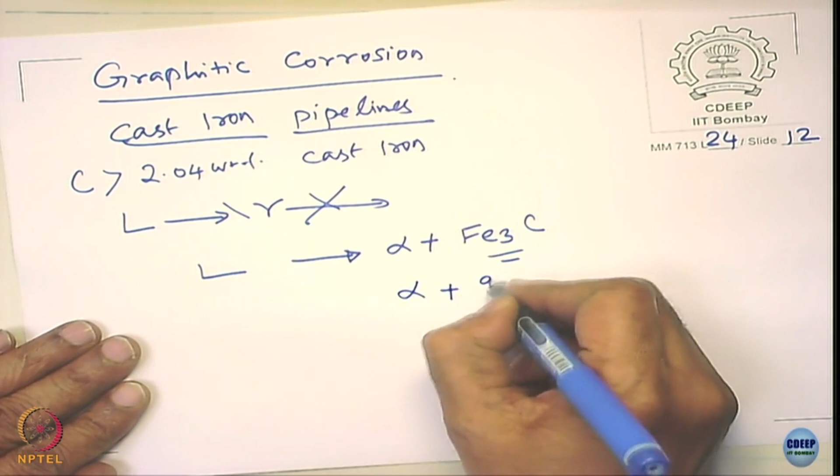The second thing is it can form a cementite along with alpha, or it can also form alpha plus graphite. Am I right?

Now of course there are different types of cast irons, which are very famous - grey cast iron, white cast iron, nodular cast iron, or one more, malleable cast irons.

What is the difference between a malleable cast iron and a nodular cast iron? Anything more? White cast iron is converted to malleable cast iron by a heat treatment process, right? Whereas the nodular cast iron goes directly from the liquid - you get the graphite there directly.

And what is the grey cast iron? Here also you get the graphite directly, but the graphite is in what form? It is in the flake form.

Now please read, those who want to know more, for example why it should form Fe3C, how is it possible for you to move without forming Fe3C, how you can have graphite, what are the additions that are added - all this you can read in some nice simple books available.

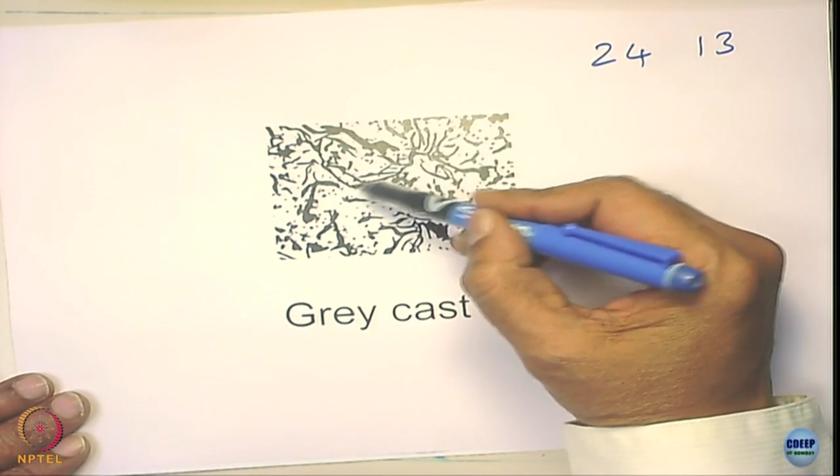These flakes are all graphite, right. The matrix is a ferrite, alpha matrix. This is grey cast iron. But what you need to know is these flakes may look a little isolated. Are they isolated? They are interconnected.

These are all something like - if you have a thickness, suppose you have a thickness of the cast iron, a flake may start from this end, it may end at this end. So these are all not isolated, they are interconnected in the grey cast iron. This is a very important thing, and for those who don't have an idea about grey cast iron, you should know this.

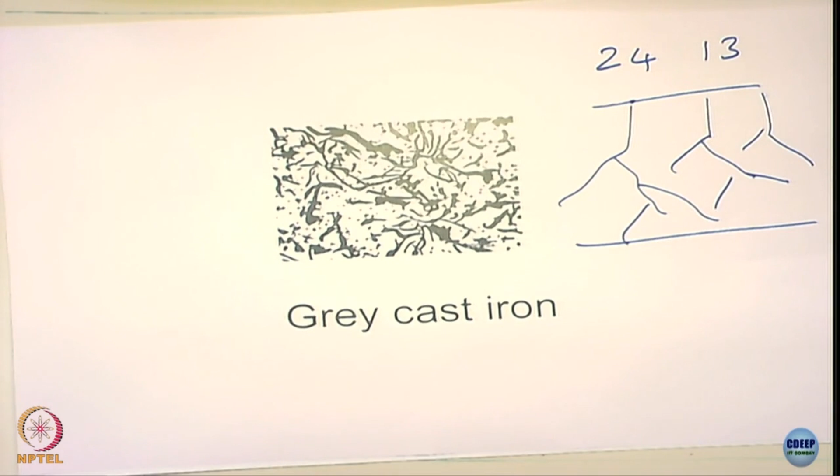It has got then good mechanical properties as compared to grey cast irons. But anyway, we are not going to discuss that aspect, but these microstructures have relevance for corrosion, and that I think we should be understanding at all. Please understand, you have graphite in the system, you have alpha in the system, which means iron with a little bit of carbon dissolved there - that is what you normally see in the system. So what is the consequence of that?

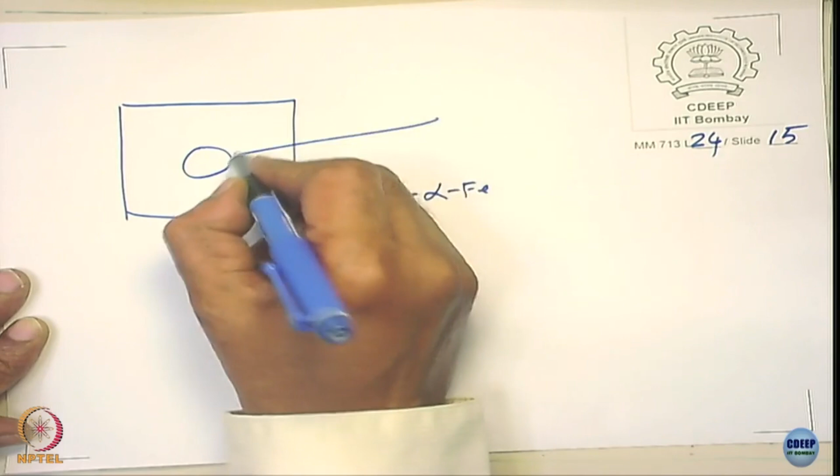This alpha iron, so graphite here, I expose to the environment. There is an environment here, what happens? What do you think will happen? I have taken this alloy and exposed to the environment, maybe like sodium chloride solution or water, moisture, something like that. So, what do you think will happen?

The iron will dissolve preferentially. Why does it happen? Graphite is noble. So, if you look at the galvanic series, I hope you will be able to recollect the galvanic series we have shown before. Graphite is noble, iron is active.

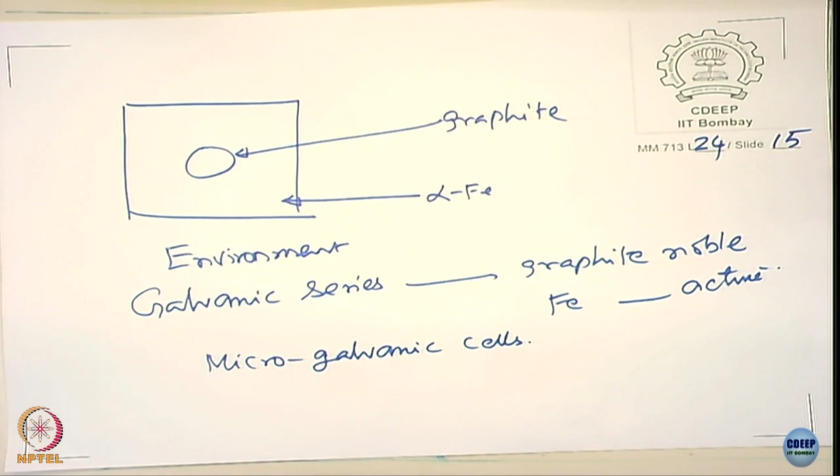So, what is going to happen? You are going to have micro galvanic cells. It is not a typical dealloying like what you see in your brass or maybe in cupro-nickel alloy system. Here there is a distinct graphite phase and there is a distinct matrix of alpha iron, and so they have a different noble and active characteristics, and the one which is noble will act as a cathode, the one which is active will be suffering corrosion, actually serious corrosion here.

So, what will happen? You will see the corrosion occurring in the interface, the corrosion becomes severe. In the galvanic corrosion, where is the attack more? At the interface. Okay, the interface corrodes. Now it corrodes like that. If you visualize this, so what will happen here?

In this case, the corrosion, suppose here is the environment here, the corrosion starts, it will proceed like that, proceed like this, proceed and start leaking here. Because of continuous thing, it leaks.

On the other hand, if I take a nodular cast iron or a malleable cast iron, if you take a cross section like this, I may have some graphites here, and I have here, like this. Now the corrosion will start here. Now what happens? They fall off. Now subsequently what happens to galvanic corrosion? It stops. The galvanic corrosion does not proceed further. The microgalvanic corrosion does not proceed further.

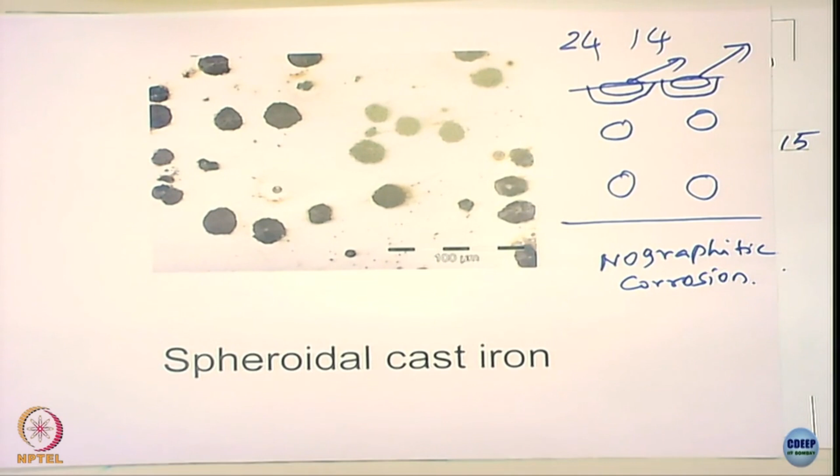So what happens now? That means no graphitic corrosion. Now the graphitic corrosion that occurs in the grey cast iron obviously depends on the environment. See, so it's a pipeline, it is the soil chemistry that becomes important. You have, for example, an acidic soil and a lot of chlorides, the attack becomes more.

Nowadays this is not much of a problem because people do not use grey cast iron that much, since they have come to know there is a problem. Earlier days when there were pipelines, the problem started when they were paving the roads, when they start digging the roads, the excavator, the shock waves that went and hit this pipeline simply caused the cracking. See what happens, imagine that I have a dissolution process here. All the iron slowly dissolves, there is a residue of graphite just sitting on the surface.

So it loses its mechanical integrity, and so even a small impact given onto the pipeline, it just fractures. So these were the problems, just after Second World War, there were a lot of problems. But nowadays of course people are very clever, they do not use grey cast iron, but it is important for us to understand the science behind this and why we do not use grey cast iron for many of the pipelines, but cast irons are good.

If you compare the cast iron versus the steel, generally the cast irons corrode at a lower rate. I am talking about uniform corrosion, because the cast irons may have some silicon and other elements which make them generally more resistant to uniform corrosion. But if you have grey cast iron, the problem comes out of the localized attack that happens between the graphite and the iron matrix, leading to leaking of the pipelines.

People in those days were storing even sulfuric acid using cast iron tanks, and sulfuric acid would leak from inside to outside. The whole structure looks very intact, but it oozes out because the corrosion occurs between the graphite flake and the matrix, and so it starts oozing out from the surfaces. So the only way to avoid this is not to use grey cast iron, people use what is called malleable cast iron or the nodular cast irons.

So that should bring us to the end of the discussion related to dealloying and selective leaching, and I wanted to go through this.